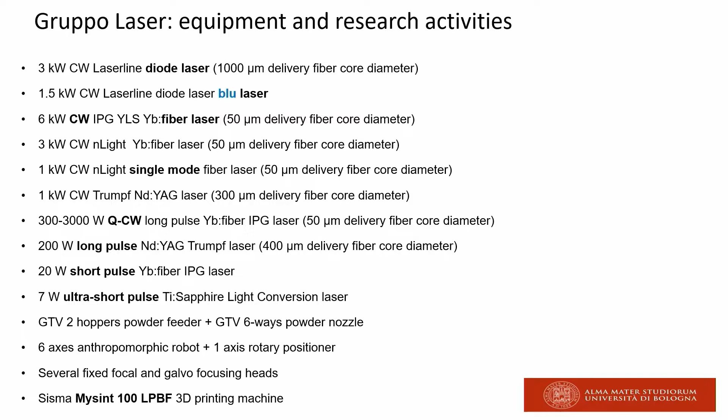And now we have also a blue laser in our lab, and we are studying and using that new source for different applications. Of course, we have a QCW laser and different pulsed lasers: short pulse, ultra short pulse, and long pulse lasers. And then we have the possibility to use all those laser sources with different focusing heads and scan systems.

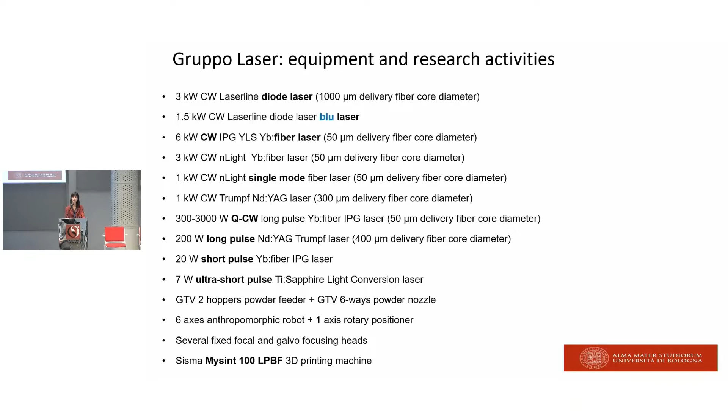We have different handling systems, and at the end of the list, you can see that we have the possibility also to study additive manufacturing processes, because we have a laser powder bed machine in our lab, and we have the possibility also to use a direct energy deposition system.

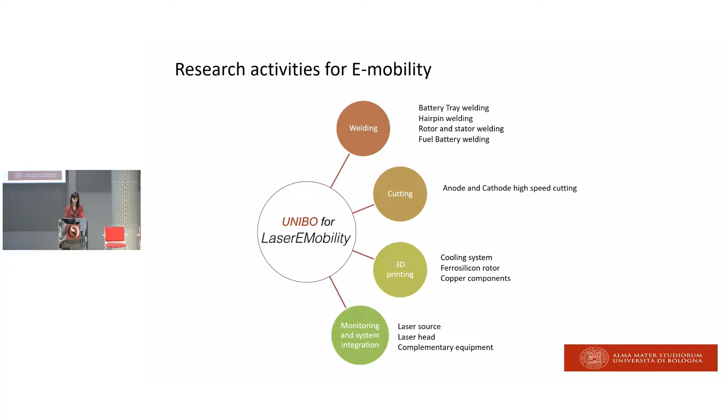In relation to the topic of this workshop, the Laser Group exploits the knowledge acquired in laser welding, laser cutting, and 3D printing in order to develop those processes for the e-mobility sector and e-mobility applications. So now we are actively involved in several processes, as you can see here, and I will talk about that in my speech.

So let's talk about our activities, and I would like to highlight the dual nature of our work, because we carry out applied research activities to meet industrial needs, and we carry out fundamental research activities because we are researchers and we would like to improve our knowledge. We would like to write scientific papers, of course.

So let's talk about applied research activities, and I would like to start from laser welding. We are involved in different laser welding applications, and so here you can see some examples: hairpin welding, welding of electrodes, busbar, and of course battery case. And I would like to show you and explain our approach to this activity.

So we are a university, and so we usually start from laboratory experiments. So we start from a simple sample in order to investigate the whole possibility of the results that we can obtain with our equipment. And so we try to optimize the process in laboratory conditions at the beginning. So really simple geometry and really simple setup.

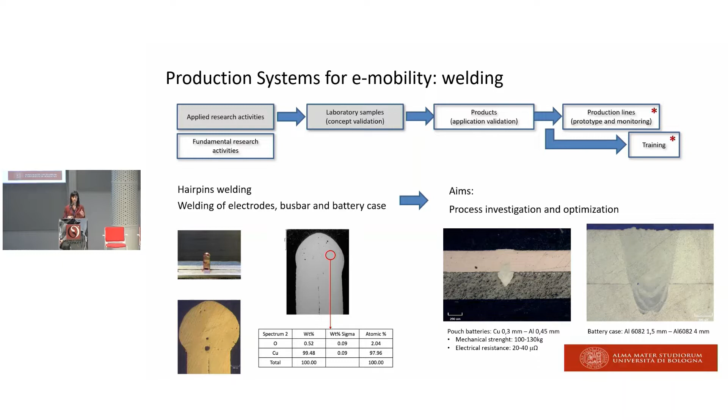And we would like to do that testing different laser systems. So we would like to find feasibility windows for different laser sources, for example, or a system, because we usually find a solution with different systems, and this is our principal aim. And when it's possible, we try to optimize a process, an application, using, of course, different approaches, and when it's possible, also different process configurations.

Here we have an example. We are studying welding for battery cases, and we are trying to do that with or without filler wire. And we would like to do that to solve some manufacturing issues. For example, in that case, we would like to control cracks, we would like to control misalignment, we would like to understand the effect of heat input on the final results. So in this first step of our work, our aim is to find different solutions, and we would like to correlate the results with the system that we have used.

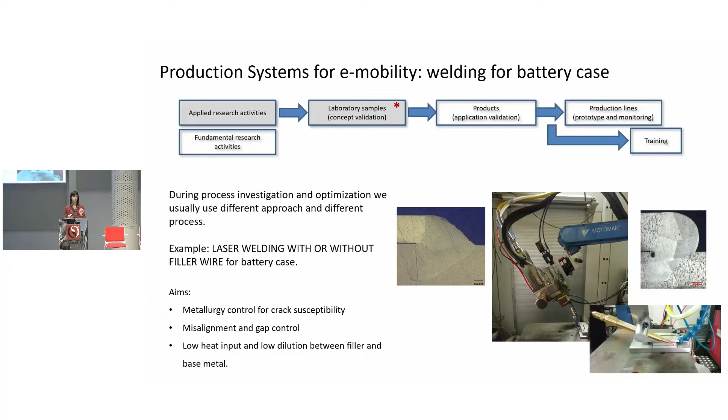Then we start to repeat our experiments on real components and real geometries. And usually we do that in our labs. So we always stay in a simple condition at this phase. But our approach is to try to scale up our knowledge, so from simple samples to real geometry, and the aim is to validate our results.

And of course, we have some help from some methodology, some instruments, and as you can see here, we use the design of experiment method, and in the last few years, thanks to the work of a colleague of mine, we are trying to use machine learning concepts in order to understand the effect of different process parameters or laser systems, for example.

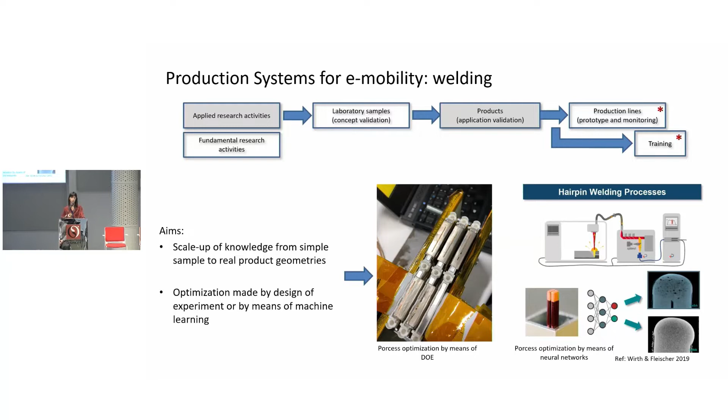And at the end of these two steps, what can we do? We have tested different laser sources, different process configurations, different laser heads, for example, and when it's possible and useful, we have tried to use complementary equipment, for example, monitoring systems. And so we can help companies decide which is the best configuration for their specific application. So we can help them during the design of their production line. Of course, we can help them only from a manufacturing point of view.

And in that phase, usually we can ask the help of Nextema, which we have already seen today, and Professor Tomesani told you about the work. And of course, we are a university, so we can offer staff training in order to give the company the expertise and the knowledge of the process that they would like to improve.

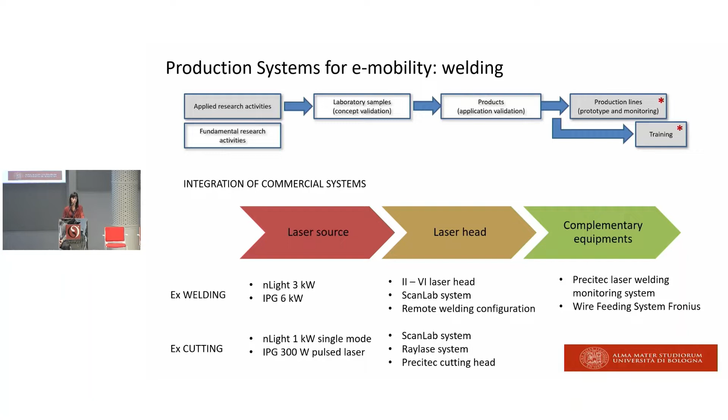But now let's talk about our fundamental research activities. And we can start from laser welding activity. With this topic, now we have three main fundamental research activities. The first of these activities is related to the study of the interaction between different laser sources and highly reflective materials. So we are talking about aluminum alloys and copper alloys today. So we are studying this kind of interaction.

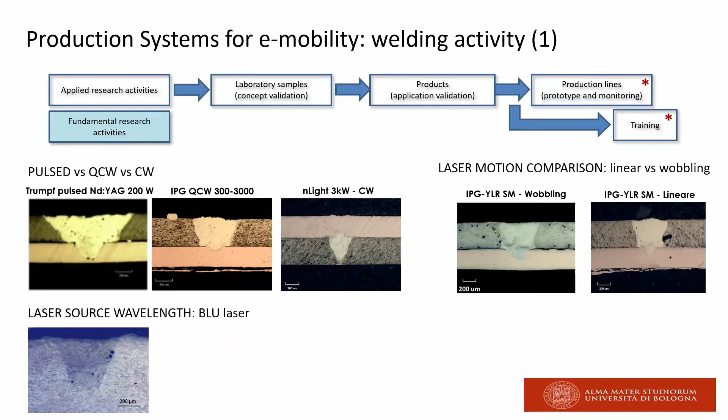And, you know, we have the possibility to use very different laser powers, laser systems from different suppliers, and so we can compare our results by changing the power emission source, so from pulsed laser to continuous wave laser. We have the possibility to test laser sources with different wavelengths. So now we have a blue laser, so we compare the results that we can obtain with this wavelength with our previous results with near infrared laser. And we have done a lot of work also in laser motion comparison, so from linear motion to wobbling, for example.

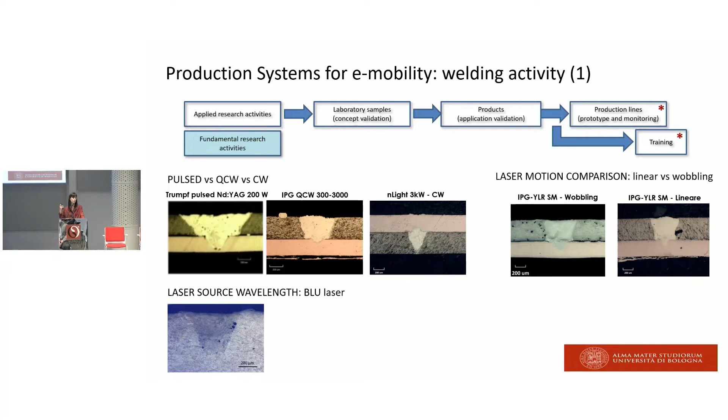Our second activity is a very recent activity, but I think it's really interesting for us and for industry. The topic is the monitoring of the process towards zero defect components. And what can we do now? Now we are in a really early step of our work, so we are studying, we can acquire raw data, we can try to analyze the data, and we would like to correlate that data with specific defects. So we are using a commercial system, and now we can do nothing more than you have already seen in these 2 days, but we are studying and trying to collect data.

And we would like to do that because, as I told you previously, we are trying to feed our machine learning algorithm in order to detect defects, from a research point of view. And of course, we also have a long-term objective, and we are really far from there, but we would like to do it. The concept is to reproduce our process with the digital twin concept, and we would like to predict those defects.

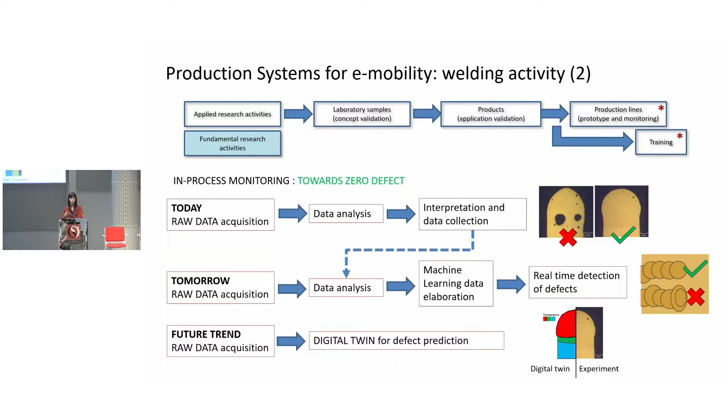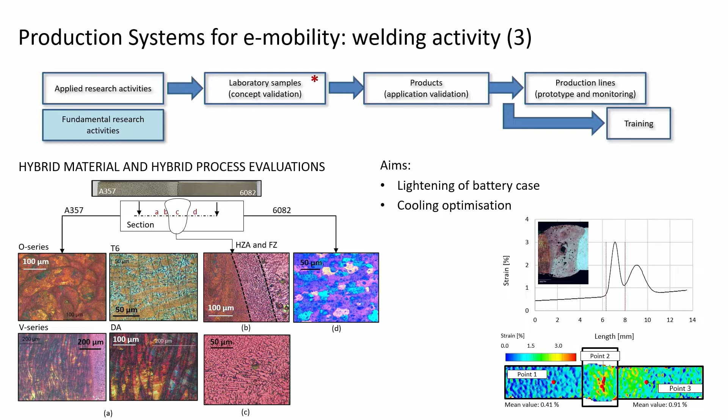Our third activity is a junction between our knowledge, because some of us study additive manufacturing processes and some others are really specialized in laser welding. And so we are trying to use our knowledge in order to understand the effect of this hybrid process. We are now studying laser welding between traditional hot rolled components and additive manufacturing components.

And why do we do that? Because studying additive manufacturing processes, we think that it's possible to optimize components also in the e-mobility sector, and we think that we can increase the functionality of these components. But we would like to understand the behavior of these components with different mechanical properties in post-processing conditions.

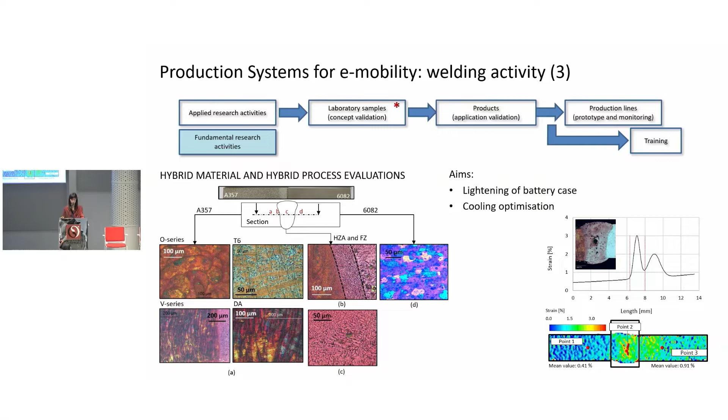So in that specific case, we would like to understand the quality of welding from these two different components. And so we are trying to optimize process parameters, post-process parameters, and we are studying the mechanical properties of that hybrid junction.

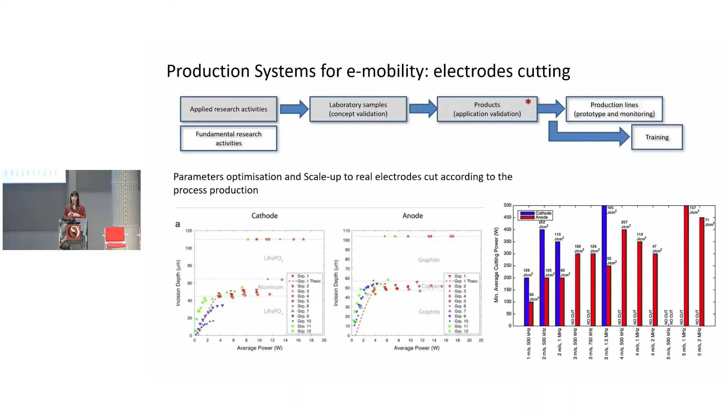Then I would like to briefly talk about high-speed cutting of anode and cathode. We have done a lot of work in the past, and we are starting again to work on this topic. Unfortunately, I can't show you recent results. So here you have some state of the art for us, but the idea is the same. The difference is the hardware that we now have the possibility to use. So we would like to test and use this new generation scan system, and using them we would like to understand the quality of our cutting, also changing laser sources.

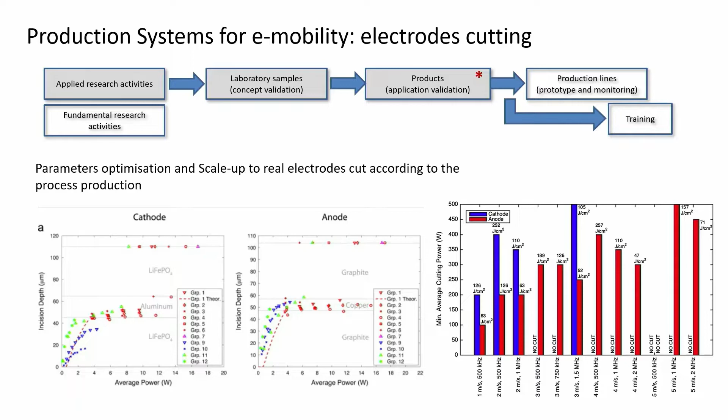So we are carrying out a very big experimental campaign in order to define advantages and disadvantages of using different laser systems. And of course, with applied research activities, we also try to carry out fundamental research activities, and so for each configuration, we try to go in depth and analyze the quality of the cutting, the profile of the cutting, and of course the edge of the cutting in order to correlate process parameters, laser systems, and cutting quality.

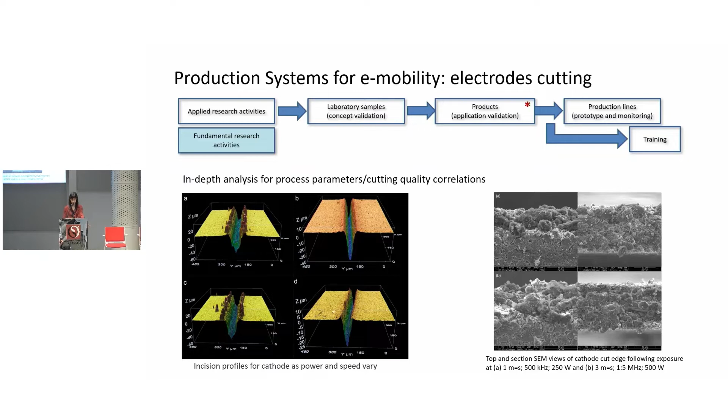At the end of my presentation, I would like to say a few words about our activity with additive manufacturing, because we are carrying on several projects on that topic, both from the industry point of view and fundamental research activity. And now we have the capability in our group to redesign components for additive manufacturing, also for EV components.

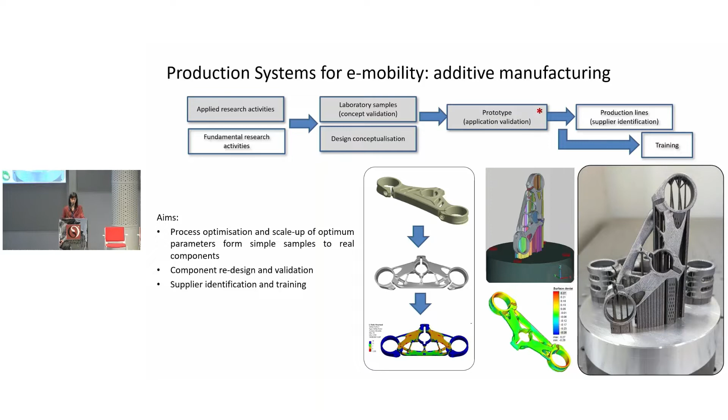And we can do that because, of course, we have commercial software and we can use it, but also because we have the knowledge of the process. I told you that we have a machine, so we know very well the manufacturing issues of additive manufacturing, and so we can use our knowledge in order to really increase the functionality of components.

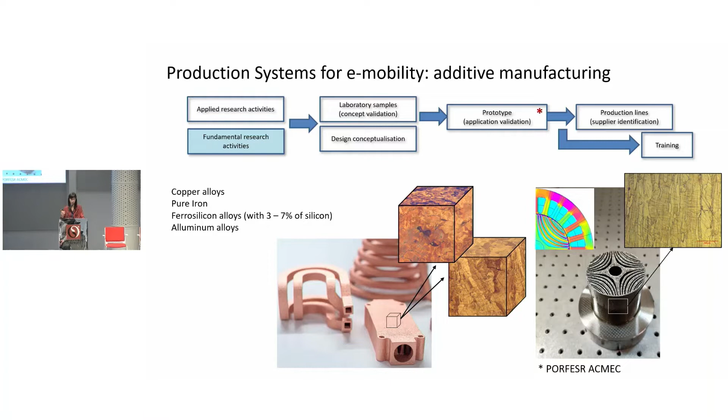And at the same time, we are trying to optimize process parameters for complex materials such as copper alloys, for example, for conductive components, pure iron and ferrosilicon alloys with different silicon percentages for new generation rotors; we have a regional project on that topic. And of course, aluminum alloys.

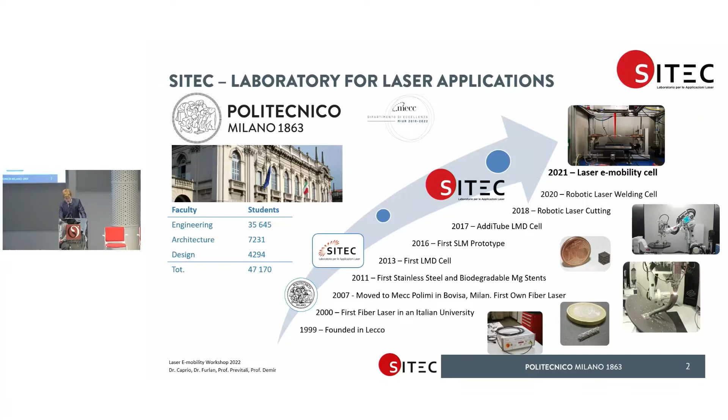Just a brief word about the team. There's one full professor, one associate professor, and there's me and another assistant professor, who direct the work of around 30 people within the laboratory. So you will usually not find me in a suit in the lab, working with my work hardware.

What you can see here is the view of our lab, with the different wire deposition cells and the laser-based manufacturing cells for the different applications which we develop together with companies. We range from laser cutting to laser micromachining, robotic laser welding, and all the other laser-based manufacturing processes that you might want to introduce into the chain for e-mobility. Most recently, we have the LaserEMobility cell, equipped with an infrared fiber laser and a green wave fiber laser.

So how do we conduct our research activities? They range from fundamental research, the understanding of the process basics, where we're working at low technology readiness level, and we tend to do this together with other institutions such as Bologna or TUM and other research institutes around the world. Then we also work through funded projects and projects with private companies, where we move to higher technology readiness levels.

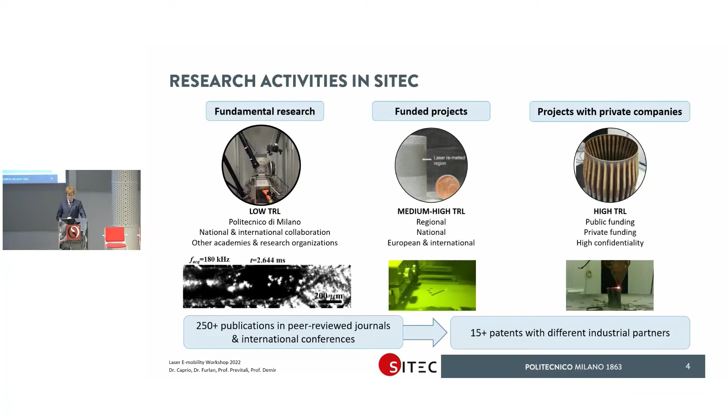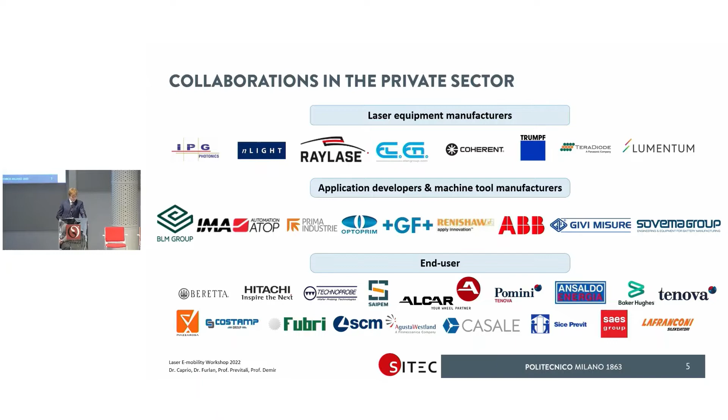So we test innovative concepts at very low technology readiness level, and then move to industrial machines, where we integrate beam shaping technologies to optimize the process parameters during laser powder bed fusion, which also allows us to advance in the deposition of new materials and alloys. Here we work towards the alloys and materials of interest for mobility applications: aluminum alloys, pure copper, and iron silicon alloys.

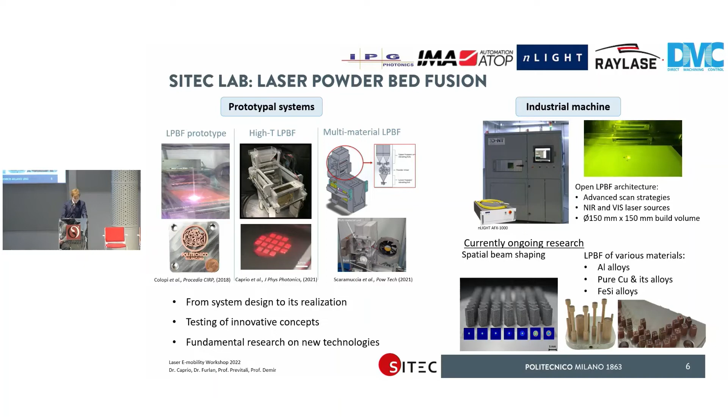Here you also see some of the robotized cells we've been developing in the last few years with our partners. We have laser systems with multi-mode fiber lasers equipped with wobble heads and a powder hopper. Here is also a high-speed video of the laser wobbling process while we make a lap joint weld. We've also been developing sensor systems applied to our components.

In this case, what you can see is what happens when we don't apply seam tracking to the welding of this component. On the other hand, in this case study, we are actively employing our seam tracking system to correct the direction of our robot in real time. We've been developing this type of application together with BLM Group.

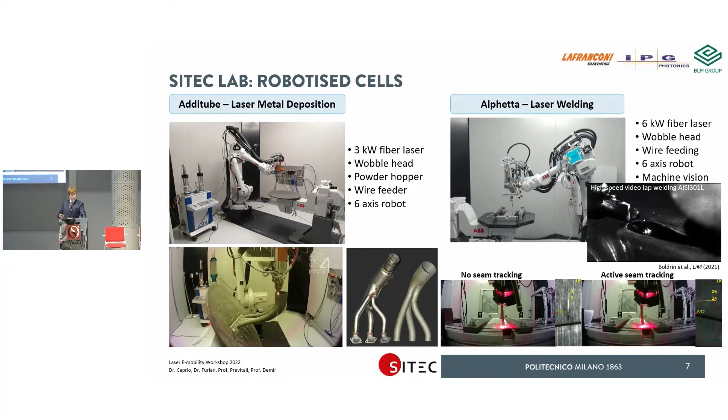And on the other side here we have the directed energy deposition, and this can be very useful for the prototyping of components. Once again, this is for, let's say, the old generation engines, but might be applied also to new concepts of materials. Okay, let's move on.

So, and also now, the new systems that we've been working on and developing are the laser micromachining laboratory, the Laser E-Mobility systems. As I said, we have different pulsed wave laser sources and remote scanner heads that are being put into process. We have equipment which allows us also to add monitoring equipment, and I will be talking to you a bit more about those aspects towards the end of the presentation.

So the advantage of these type of systems, as also Bologna is doing, and probably also TUM, is that they're reconfigurable systems, so we can develop the application based on the needs of the customer, and I will be showing you some applications that we've been seeing together.

And most recently, we've been introducing a laser-induced forward transfer system, so this is a very particular technology which allows to do a multi-material deposition in the nanometer range, and so it's an additive manufacturing technology that can also maybe be applied for the electronic sector, and this system is currently under development in the laboratory.

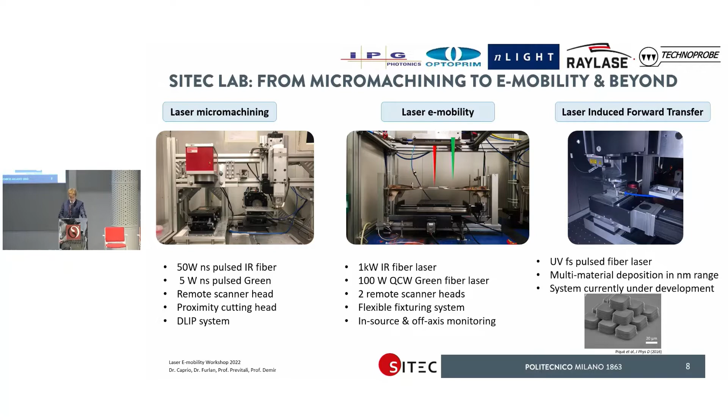Okay, and just to not forget what we do, we start from teaching fundamental courses throughout the mechanical engineering degree, where we start talking about laser systems and how they can be applied for industrial uses, and these type of courses we also hold for second level masters, and we create also dedicated training for the private sector on specific themes.

Another interesting aspect is that we are trying to get the students to come as much as possible in the laboratory and get their hands dirty. This is obviously something which requires a lot of energy on our side to get the people in the lab and to actually prototype and conduct hands-on activities. But it's also very rewarding because our students also get to actually start seeing the different laser-based manufacturing processes within the different applications.

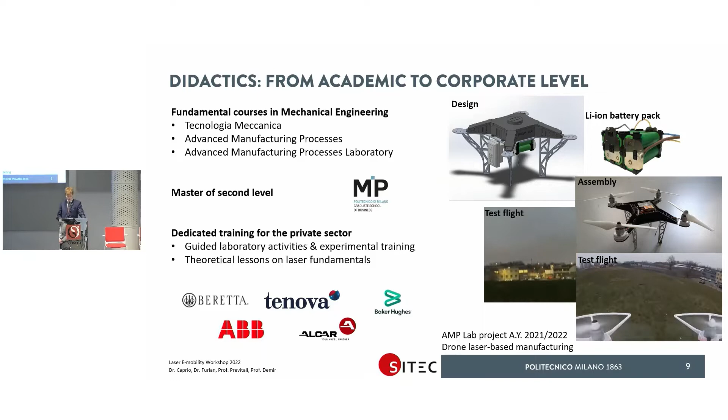So what you can see here is the case study of this year's Advanced Manufacturing Processes Laboratory work, where we've been developing a drone which was produced with laser-based processes, and we've also started prototyping small lithium-ion battery packs.

And just a very quick touch on ITEM and the Laser Safety School: for the development and the study of laser safety related issues, we've also been creating a partnership with different universities and different industrial companies within the Italian sector, so we can also be a reference for you on these type of topics, also thanks to the collaboration with the University of Pavia.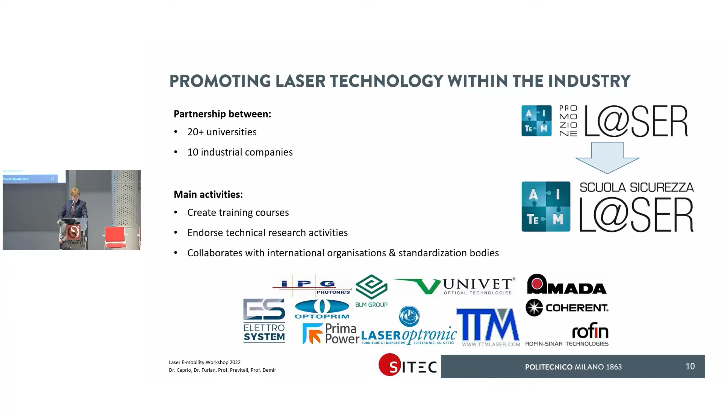So moving on to the applications that we can see in our laboratory related to the e-mobility sector. I won't be going too much in detail with regards to the industrial applications. We've already been seeing quite a lot from some of our partners during these days, but we range from hairpin stripping to carbon fiber cutting, electrode cutting processes, battery pack welding, and hairpin welding. And we're also now working on the additive manufacturing of statoric components.

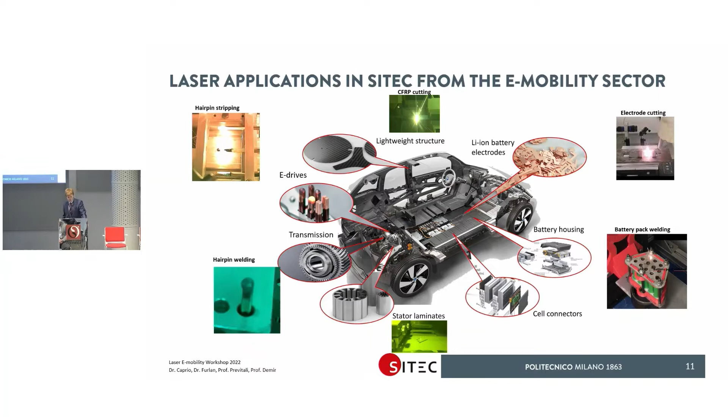And having a look at the two main laser-based processes in stator manufacturing, in this collaboration with IMA Automation Atop, we've been working on how to benchmark the hairpin welding process. So how to define the most important features that must be taken into account in terms of qualification procedures, both for the welded components and also for the stripped hairpins. So define the correct approaches in terms of material qualification, in order to identify the quality metrics that make the process reliable.

Let's see if it goes ahead, sorry.

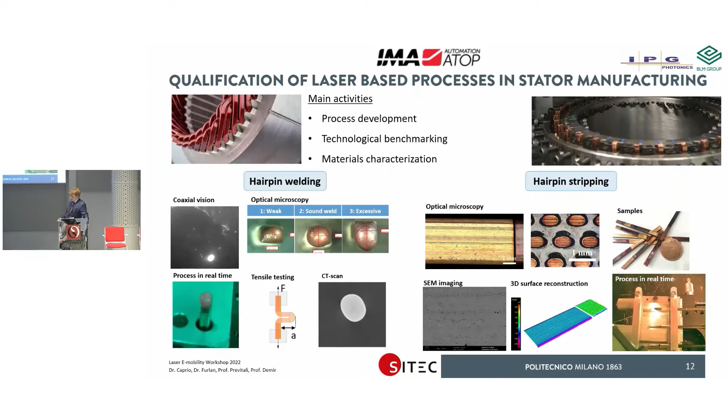And so finally, I would like to come to the case study from our laboratory. Just a couple of years ago, a crazy Master of Science student came to us asking us to manufacture a battery pack. At the time we didn't know much about lithium-ion cells, but we had to learn quite quickly in the process. So we started from the design of the battery pack.

We were talking about a 50 kilowatt battery pack with 126 volts. So it's a battery pack composed of 750 cells, which each require a dedicated welding process. And one of the most critical components that we identified was the manufacturing of the busbar, which due to process requirements, we decided to manufacture in a mixed way between copper and Hilumin.

In this way, the joining of the busbar was conducted with the Hilumin side on the lithium-ion cells, and I won't be talking much about this in detail, but what I'll be focusing on is rather the joint between the copper and the Hilumin sheet that was used, and also how we started to study more in detail how we can introduce process monitoring to identify the defect formation and some of the critical aspects that we've been seeing in these days.

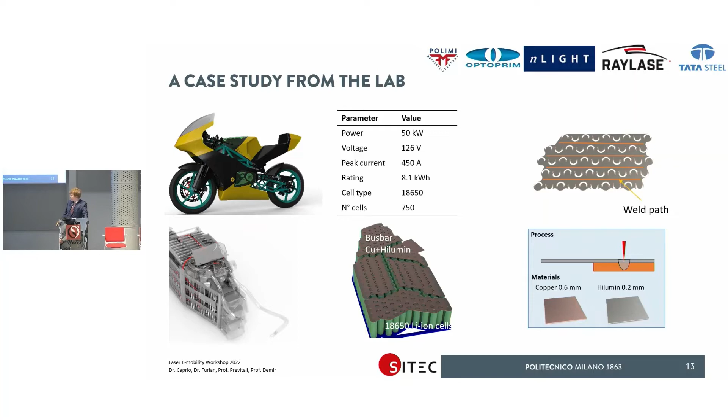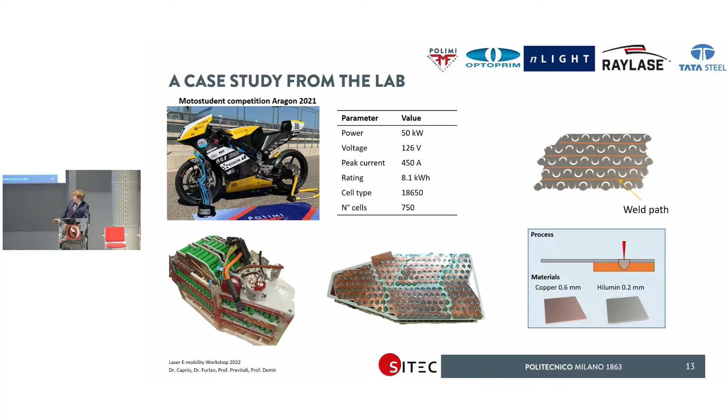And so the very nice thing, so we didn't win the competition, Bologna did last year, but there were technical issues in the final race with the electronics of the component. The battery pack was actually working quite well since we achieved the top speed of the competition and the maximum acceleration as well. And so here you can see the manufactured battery pack at the end of it.

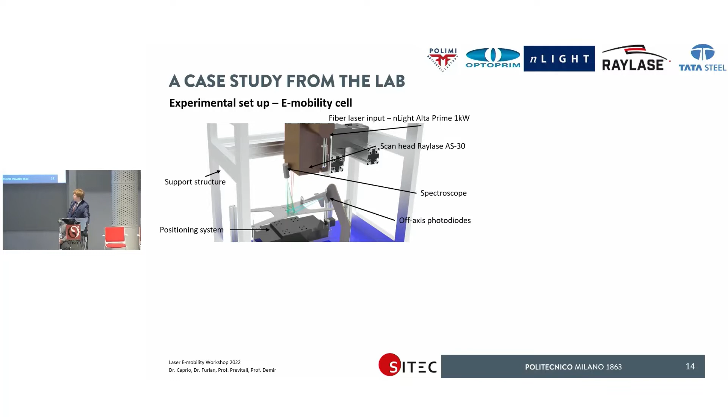And this is our e-mobility cell with the Raylase scan head and a 1 kilowatt fiber laser. And we have a spectroscope and some off-axis photodiodes that we introduced. The first part of the study of the process was related to the process parameter optimization, so identifying stable process parameters which guaranteed a good contact between the two materials.

And then we started to use these sensors that we introduced in an off-axis configuration, but they might be implemented, as you know, in a coaxial configuration in order to identify the formation of different defects. So starting from the reference welding condition, we simulated defects such as a gap of 0.1 millimeters, or having the workpiece defocused by 3 millimeters or 6 millimeters.

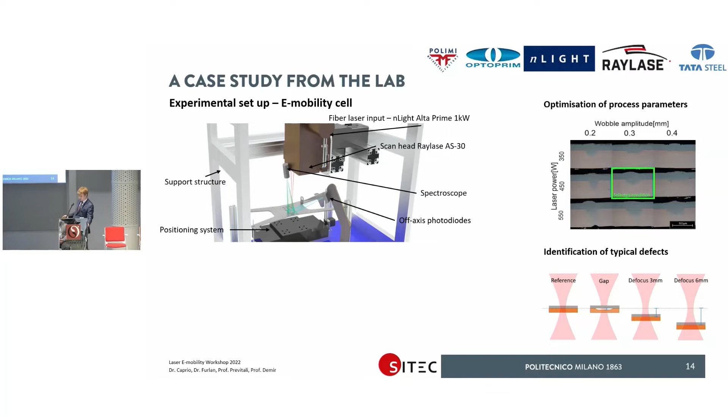And in designing the sensors, something we often take care of is the choice of the wavelength bands that we want to observe when we start observing the process. In this case, since it was an exploratory work, we started with a spectroscope and then 3 different photodiodes off-axis and 1 coaxial photodiode within the laser source that is directly available.

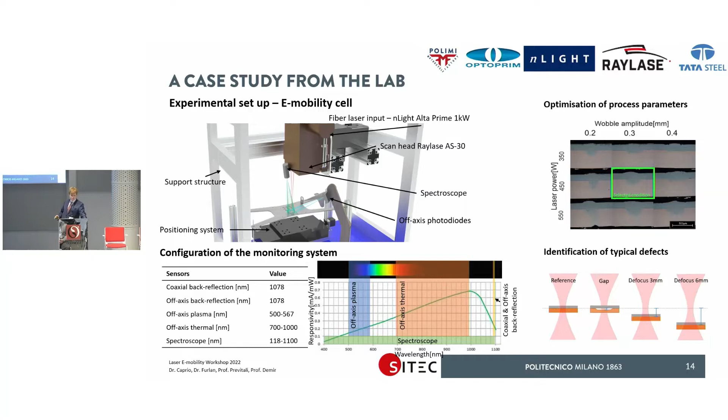And so we started viewing these signals, how they change from the reference condition, which is shown in blue, towards the cases where we have gap formation and defocusing of the component. So in the case we've placed our component badly, you can see this is the effect on one of the sensors, and this is what happens on the spectroscope.

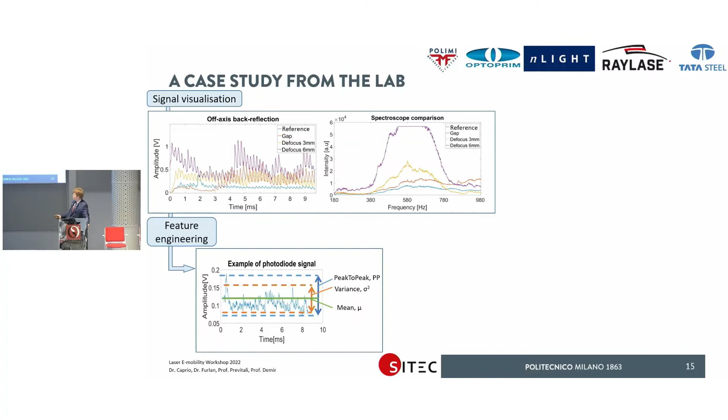And then what we do, and I don't want to make a mystery about this, it's pretty clear what we do without complex words or mysterious things. We take our signals, we start finding some statistical indicators which are significant, so we call this feature engineering. In this case, we used very simple indicators. In other cases, maybe we need to think more in detail on what we can use, but we use mean, variance, peak-to-peak values, and we use these as an input to our machine learning algorithms.

So what you can see, without going onto complex aspects, is that these different indicators for the different weld conditions come out quite nicely in our graphs. So we can start seeing already by eye how they allow us to differentiate between the different conditions. And this is the case of one of our sensors. And we can start evaluating our machine learning algorithm using a confusion matrix. And if we choose the right sensor and we tune our machine learning algorithm, we can improve the identification percentage of our algorithms.

And so just on a final note of this type of application, of the future applications also.

Let's see if it goes ahead. Okay.

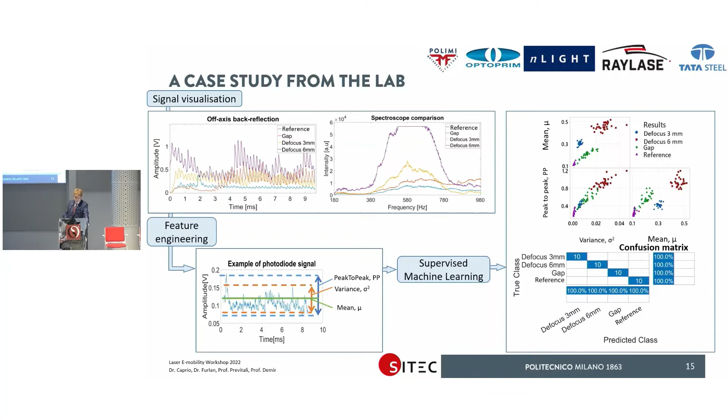So in terms of the future research in SITEC, what we're still going to work on is the study of advanced process diagnostics and control. Here we can see how we used coaxial cameras and off-axis cameras to observe the process and identify the melt pool, which is a very important quality metric. And we use this for different processes. And we can also apply this to biodegradable electrodes. So we're studying additive manufacturing of these new materials.

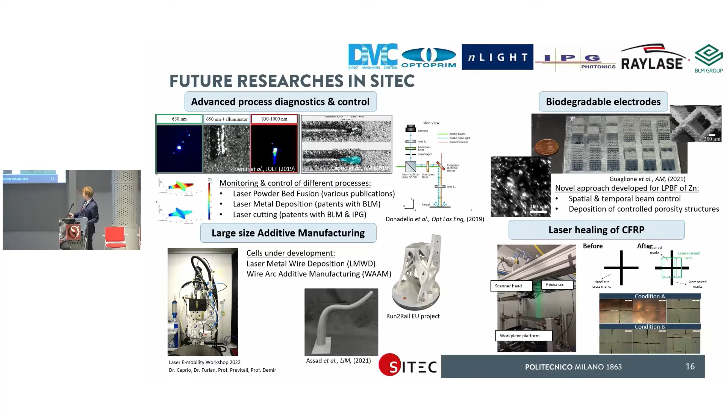And the next big things that are upcoming are large size additive manufacturing and the laser healing of carbon fiber materials.